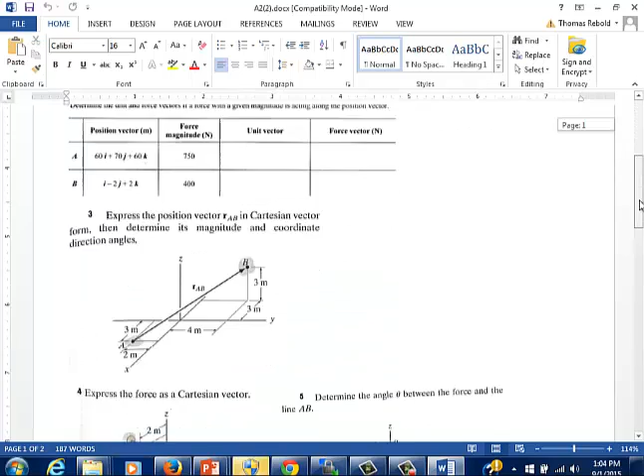And there was a question about extra credit. As I mentioned on Monday, you don't have to do all the problems in the assignment. Looking at an example, here is the assignment 2 handout. If you actually tally up all the points, there's more than 10 points here. You have 5 of these drill exercises, and then 2 of these assisted problem-solving exercises. That's 4, that's 9. And then in this case you have 2 of these 3-pointers, so that makes 15 points possible. I'm not going to give you 15 points if you do it all, so I expect you to work for free for some of that.

But the way you can get extra credit, there's 2 things you have to do. You have to do 11 points of work at least, and you have to use the grader, so I don't have to look at your work really to grade it. So if you get 11 of those right, and I can just grade it really fast, then you get 11 points. If you don't use the grader, then the most you can get is 10 points. That's my way of encouraging you to use the grader, because it's really valuable for me. It saves me a lot of time.

Josh? Does that grace period extend to the grader also? Yeah, so you have until end of day Friday. To do that also? Mm-hmm. You have until Friday to basically finalize your assignment. I leave at 5 p.m. on Friday. It's due today so that you're ready for the next module, which we're going to start today. But I have a grace period until Friday. You can turn it in up until then without losing any points. And then after that, you'll start losing points.

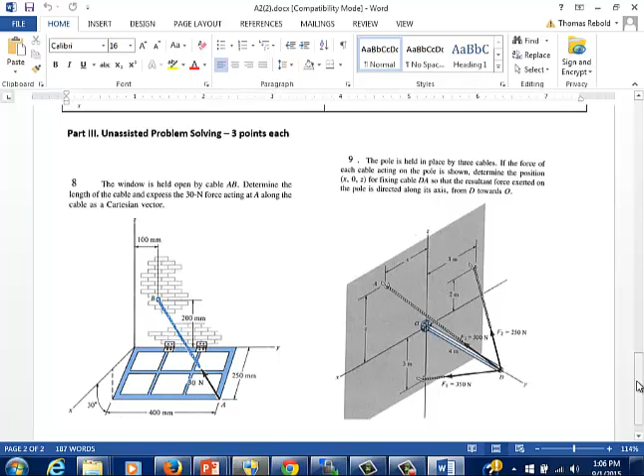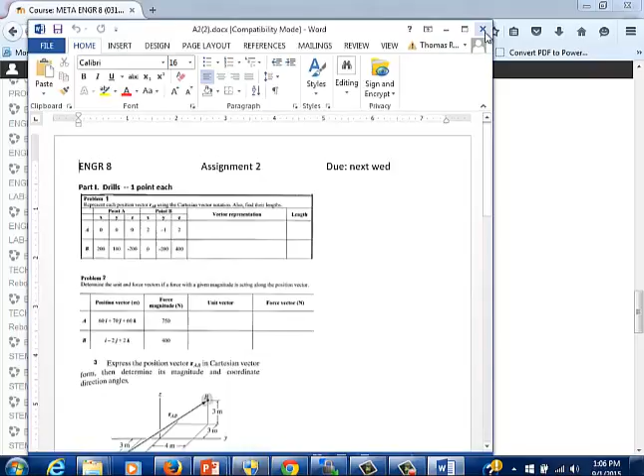So that's the shtick. That's the whole way it's going to work. Does that make sense? Any other questions on that? I don't really have that in writing about the extra credit thing, or maybe I do somewhere. But who can find that stuff? Any other questions on the way the mechanics of the class is going to work?

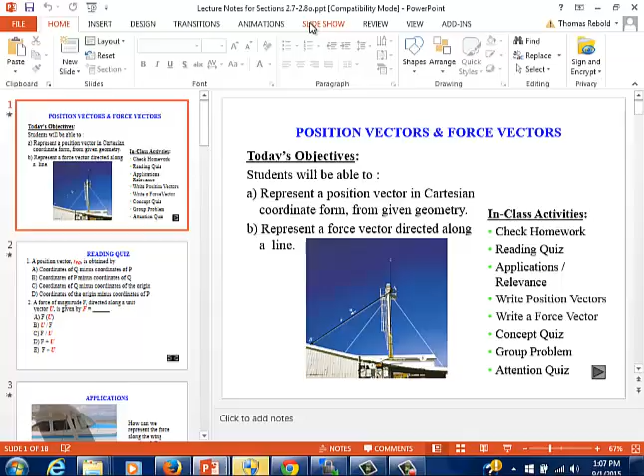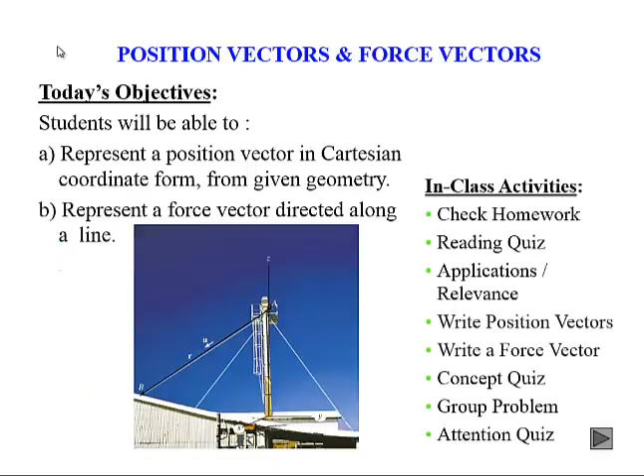So we're sticking with 3-dimensional vectors today. We're looking at 3D force vectors and also position vectors. And this is really nice because it really takes you to physical reality. This kind of stuff is where the rubber meets the road, right? This is where we actually do stuff based on reality. So it gets you out of all those abstractions you're dealing with in math and physics.

So a position vector, as you know, because I insist that you read the textbook before the lecture, as we talked about. I'm just kidding. A position vector is defined by, or is obtained by what? If we're calling it RPQ, how do we find that position vector?

It's the coordinates of Q, right, the end point minus the coordinates of P. That's how you find the position vector. It's really just telling you how do you get to Q if you're starting at P. How far do you have to go in X, Y, and Z to go from P to Q? Does that make sense? So the answer to that is A.

A force of magnitude F directed along a unit vector U would be given by what? FU, right? No, I mean F parentheses U. Right? Yeah, it would be F, the magnitude of F times a unit vector, right? That'll give you a force vector.

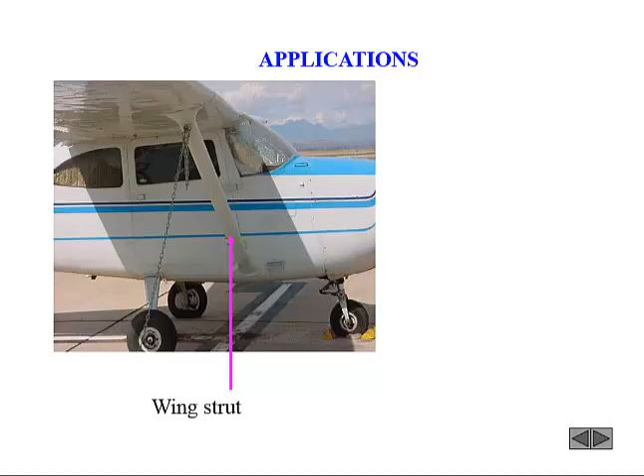It's an interesting process we're going to do today. We're going to find the position vector, turn it into a unit vector, same direction, but a magnitude of 1. And then if we know the magnitude of the force, we can multiply it times that unit vector. Now we've turned that geometry into a force vector acting along the direction of that strut. So it's an interesting process that we're going to be doing, starting with the position vector.

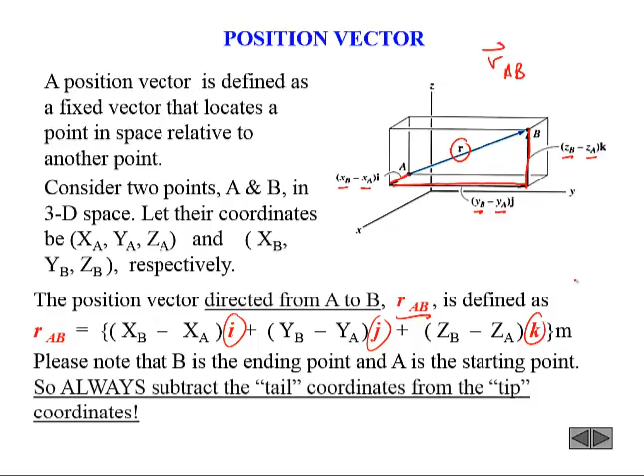So the actual position vector is defined as RAB equals (xB minus xA) i hat, plus (yB minus yA) j, plus (zB minus zA) k. That forms a three-dimensional vector. B is the ending point, and A is the starting point. We always subtract the tail coordinates, the starting point, from the tip coordinates, which is the ending point of that vector.

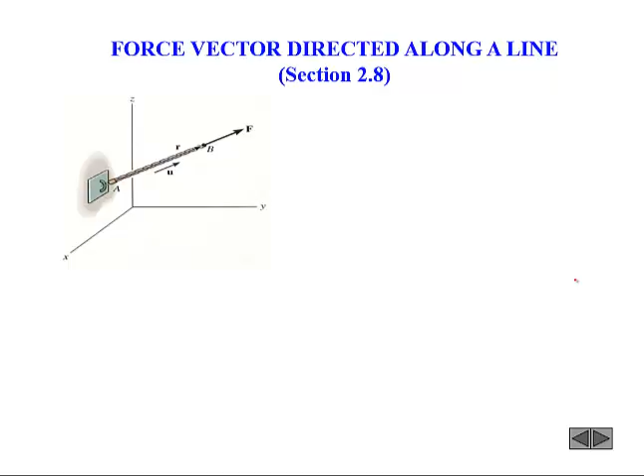Now, in many cases, when we have like a rope or a thin beam of some sort, the force is going to be directed along the line of that material, whether it's a rope or a piece of wood or whatever. And so to represent it in Cartesian form, we would start with a position vector that really is closely linked to the geometry of the problem.

This rope might be attached between point A and point B. And say we know that the rope is pulling on that bracket at A with a certain force, and we want to identify this force as a 3D vector. We know that force has to be acting along the line of action of that rope, which is attached between points A and B, right?

So the process is we first find the position vector to figure out how you get from point A to point B. That's going to determine the direction of our force vector, right? Because when you pull on something with a rope, the force is acting along the line of action of that rope, right?

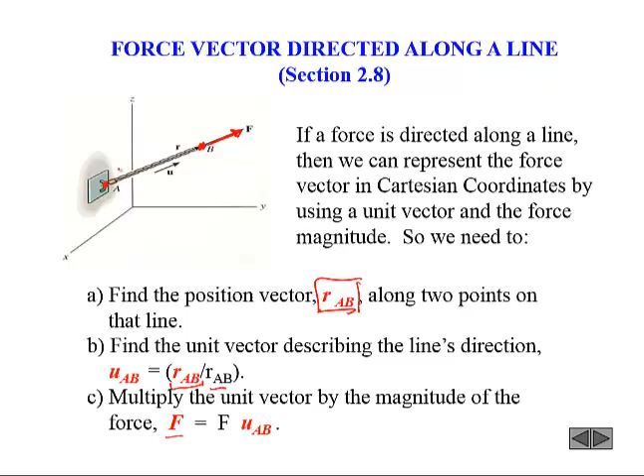So we first find that position vector. We turn that position vector into a unit vector by dividing by the magnitude, right? So RAB divided by its magnitude is going to give you a unit vector. That unit vector happens to be pointing in the same direction as the force vector. So all you got to do is take the magnitude of the force and multiply it times the unit vector, and now you've got a Cartesian force vector representing the force applied to that bracket at A. Okay? So kind of a three-step process that you got to do to compute that.

So in our example today, we have a crane that's supporting a steel plate at 3 different points. And we are told in our problem that there is a 400-pound force acting along the cable DA. And we want to find that force FDA in Cartesian vector form.

Okay, so the process is going to be involving, first, we have a lot of geometry on this problem. And so we're first going to have to find this line connecting D to A, because we're told that the force is acting along the cable. So the first thing we're going to do is we're going to find RDA. Okay, and the slow way, just to show you how this works, is you can find the coordinates of point A. What are the coordinates of point A in this diagram? Yeah, it's located right up the z-axis, right? So x and y are 0, and the height of that is given on the diagram as 14.

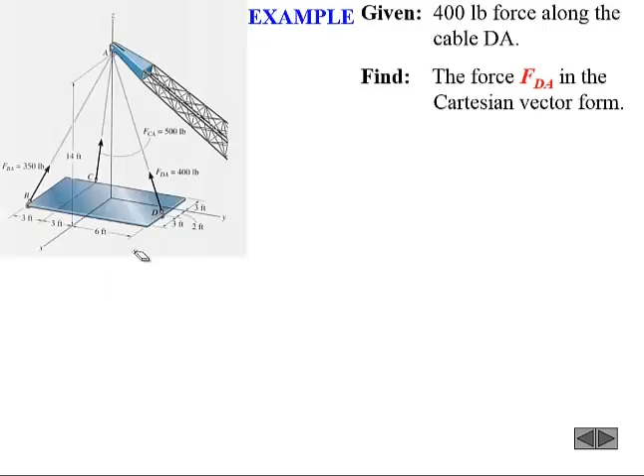Yeah. So we found the force in Cartesian form. Now we're going to see the answer again in typewritten form, so you can see how they did it. This is how you'll normally do it. The figure shows that when relating D to A, we will have to go minus 2 feet in the x direction, minus 6 in the y, and 14 in the z, right? So you can basically read the position vector right off the chart. It's not that hard, right?

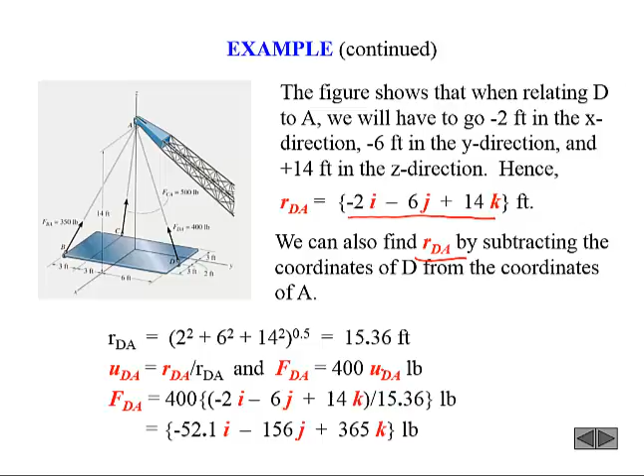It does say you can also find it by subtracting those coordinates if you want. But then you find the magnitude, you find U_DA, you divide, and then you find F_DA as 400 times U_DA, and you're good. Okay, that wasn't so hard, was it?

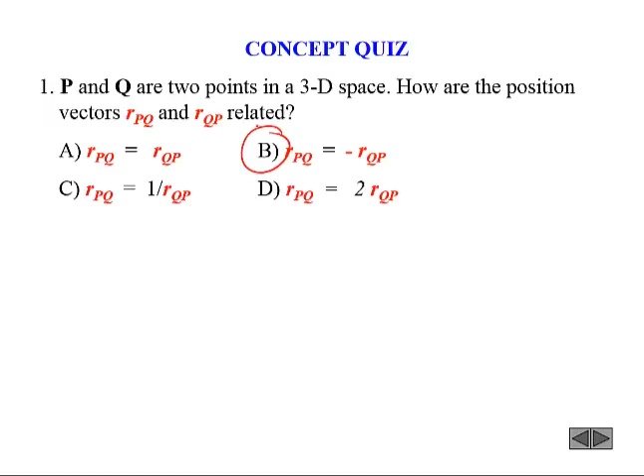Well, try this out. If P and Q are 2 points in 3D space, how are the position vectors R_PQ and R_QP related? They're negatives of each other, right? You would multiply by -1 to get from one to the other. So the answer is B. And if F and R are force vectors and position vectors respectively, what are the units of R times F over F?

Yes, and in fact, we are going to be doing units like that when we do cross products and torques. So that is going to come later. Okay, I think this is on the back side of the handout where you have another problem: two forces acting on a pipe. We are asked to find the magnitude and coordinate direction angles of the resultant force. This one's going to be a lot of work because we have to find two vectors. We might not even have time for it all, but let's give it a shot. Crank it through.

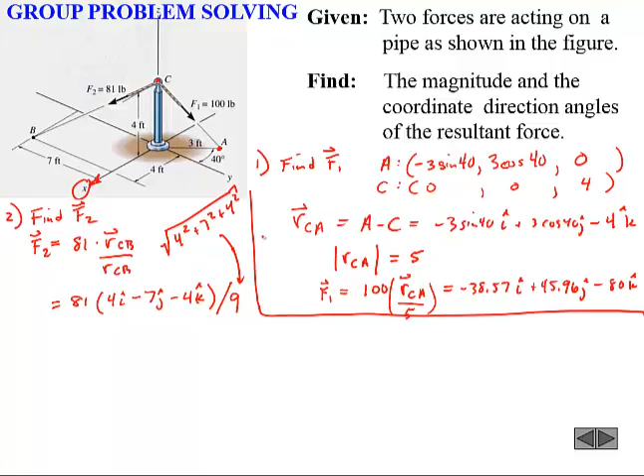Good? I'm curious about divided by 9. Yeah, so that 9 is the square root of 4 squared plus 7 squared plus 4 squared, right? Sometimes they choose these things so they're nice, neat numbers, which helps speed up the process considerably.

So then our resultant is just F1 plus F2. And cutting to the chase, it works out to be minus 2.57. You can tell the x component of F2 is going to be 81 over 9, that's 9, times 4 is 36, right? And we're going to add to that minus 38.57 from F1, giving us minus 2.57 in the I direction.

Oh, actually, sorry, I missed a step. I shouldn't deprive you of that. I did consolidate F2. F2 turns out to be 36I minus 63J minus 36K.

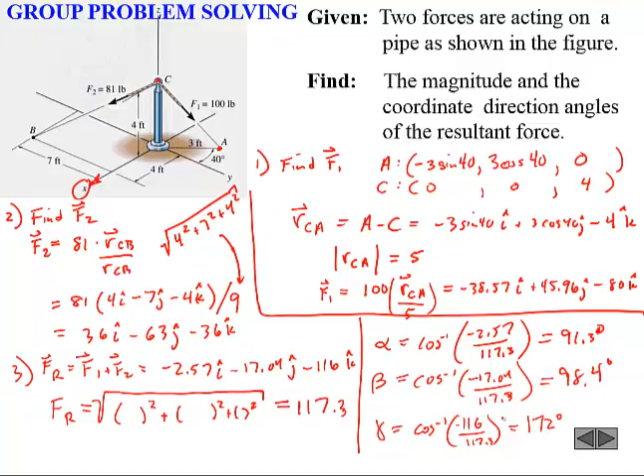And again, these slides also show you how to do it a slightly different way, a little more compact, kind of cranking through the same thing there, giving you the same answer. So common sense, what is that telling us with these direction angles, by the way? Does that help you visualize how that force is oriented? So when alpha is 90 degrees, that means the resultant is 90 degrees away from the x-axis. It's sort of trying to figure that out. And beta is 98.4, so it's, I don't know, I'm not really getting it, are you?

But 172 means it's almost pointing sort of straight down, which kind of makes sense because those ropes are kind of opposed, and it looks like the resultant is kind of coming down something like that. Do you agree? Something like that.

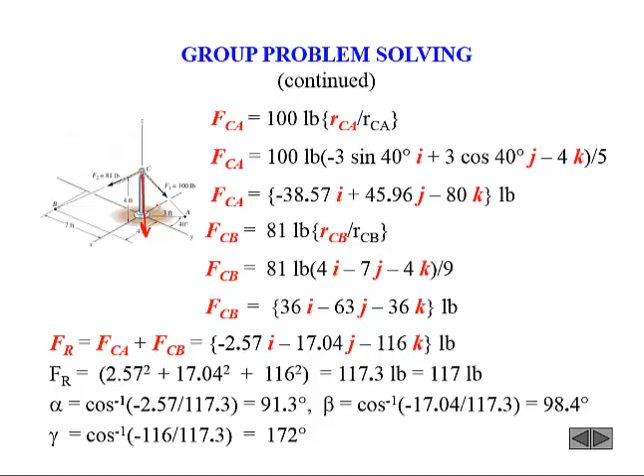Okay. Are you ready for the attention quiz? Yes. Tell me there's going to be a quiz today. There's a quiz every day.

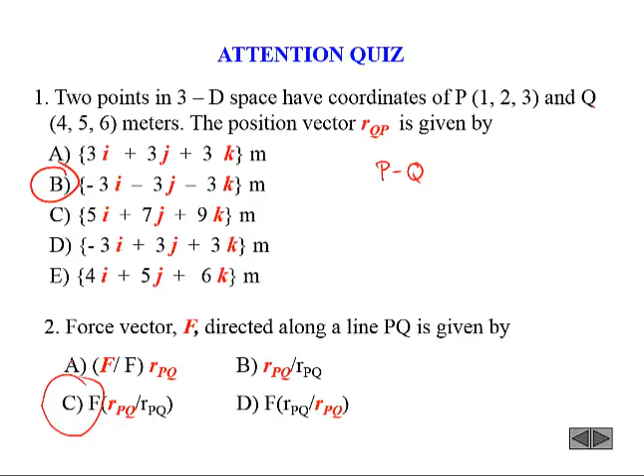The force vector F, directed along a line PQ, is given by what? C. The red ones are vectors, right? I agree. Yeah, red are vectors. I concur. That is it.

We finished early, which is good because I have to go to a meeting at 2. And I have to print out some stuff. So get out of here, you guys. I'll see you tomorrow. Don't ask me any questions today. So, Tom, submit answers today and then bring the sheet tomorrow? Bring your work solutions tomorrow. Yep. Or till Friday, right? Yep. Perfect. Thank you. Right here. Yep. Thank you.